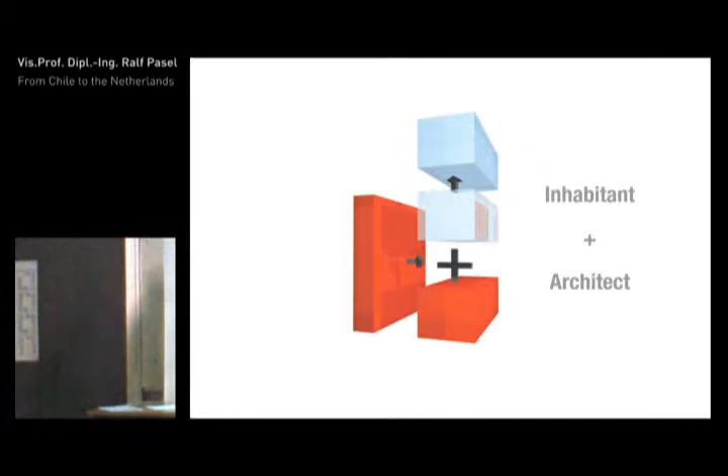So actually it is a combined design project, if you want—not a ready-made design, but more a strategic design, where we as architects just build a part of the house, and the client, the future inhabitants, continue permanently to change, transform, and adapt the house.

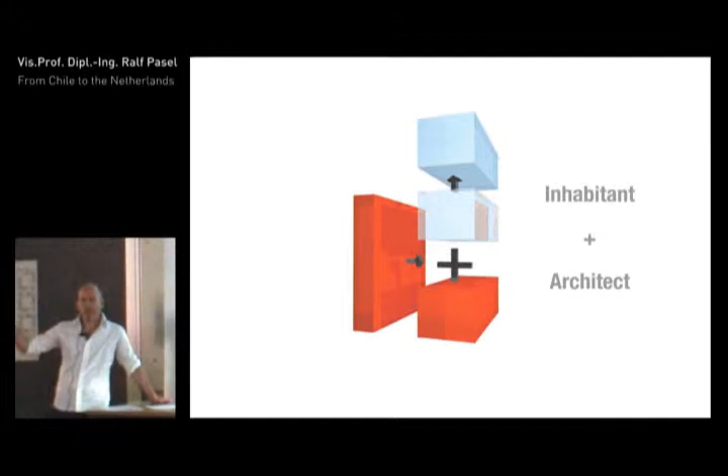So there was no point zero where we could actually take photographs of the whole lot of our work, since by the time they finished house 10, the first one was barely recognizable again. The speed of transformation in these areas is incredible.

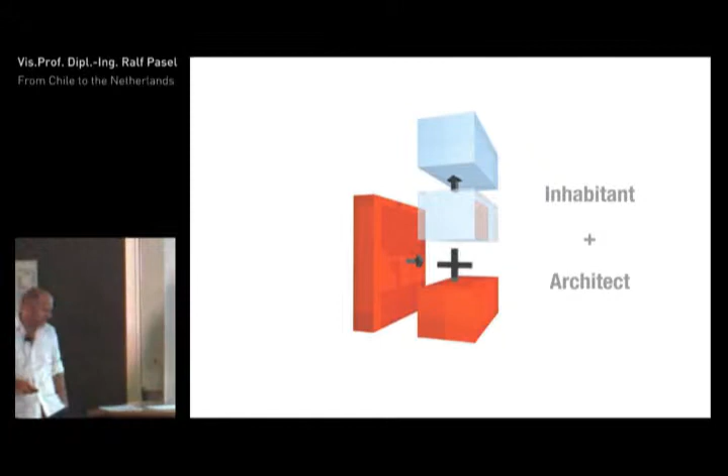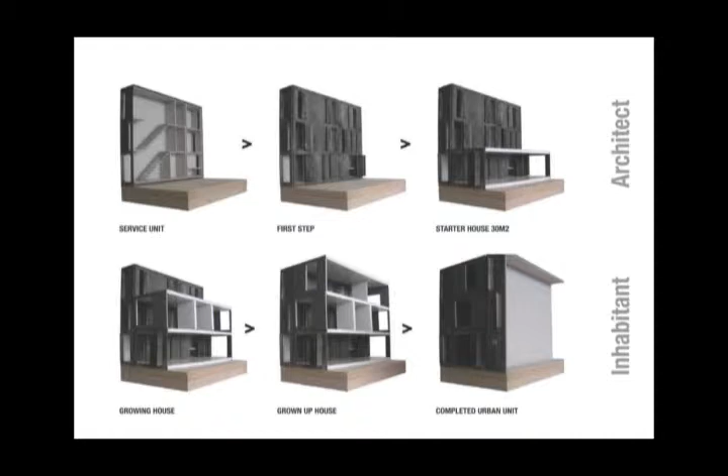The backbone of the house, the slab, that in the first three images, that comprised everything that's technically complicated: ducting, wiring, stairs, kitchen, bathroom, front door, house number - very important, don't forget the house number.

You cannot apply for electricity, you cannot have a mobile phone if you don't have a house number. So first of all, we had to give all these people house numbers, because without this funny house number, you do not exist. Actually, that's not only a Chilean problem, that's also a problem in a lot of countries in Africa as well - a typical slum problem.

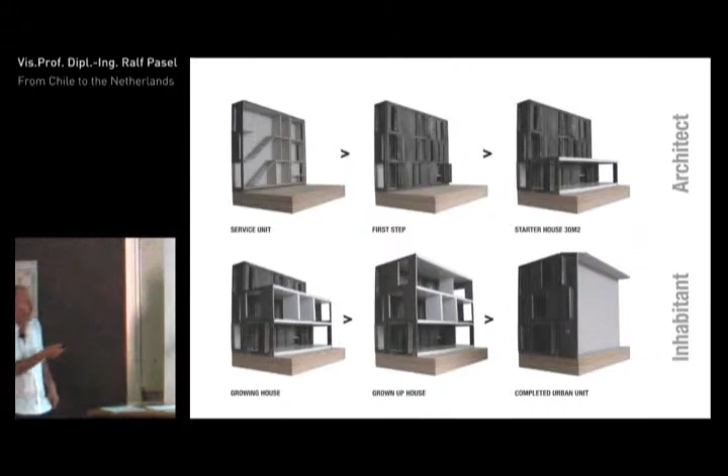Anyway, the job of us, the architects, were the first three phases, let's say, of the three images in the model, and then the inhabitants continued to work on the building.

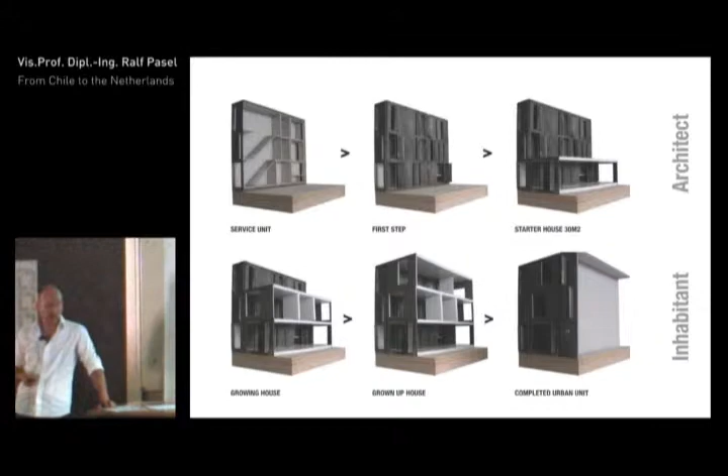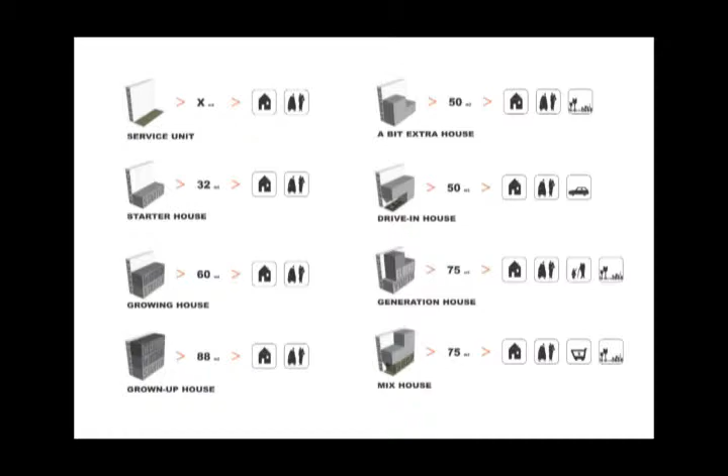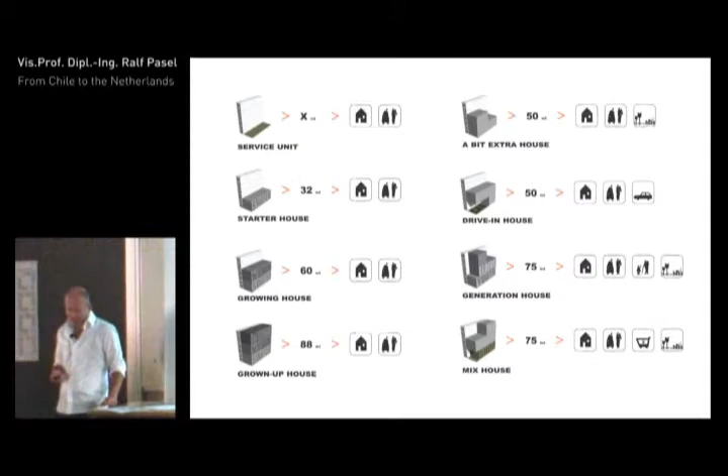Needless to say that 3 generations, 9 people have different needs, different wishes, different necessities in how they use such a building structure, in how they cope with it, and in how they're going to explore it further. The only thing that was clear to us very quickly is one of the big problems of these neighborhoods is actually that there's no public space.

Public space is swallowed up by informal developments, illegal developments, for about 55%. That's also a funny distinguishing factor, actually - informal development is not necessarily illegal development.

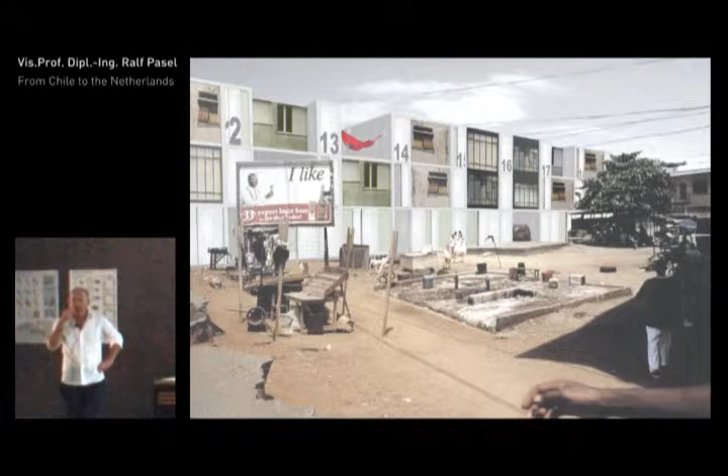But anyway, by introducing a 3-story high building structure, we got the opportunity to generate extra space - space that could be used for meetings, that could be used for collective festivals, that could be used for any kind of encounter where people could meet, sit together, eat together, or do whatever they want together.

They could talk together. A space that we think is so absolutely natural to us, these semi-private spaces, but to them a totally new phenomenon.

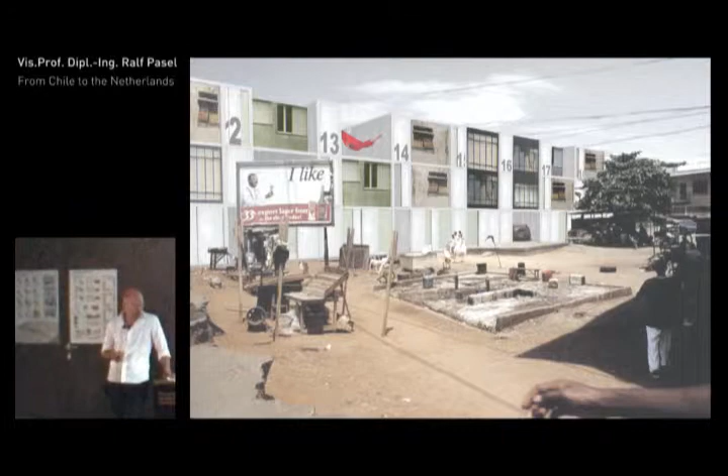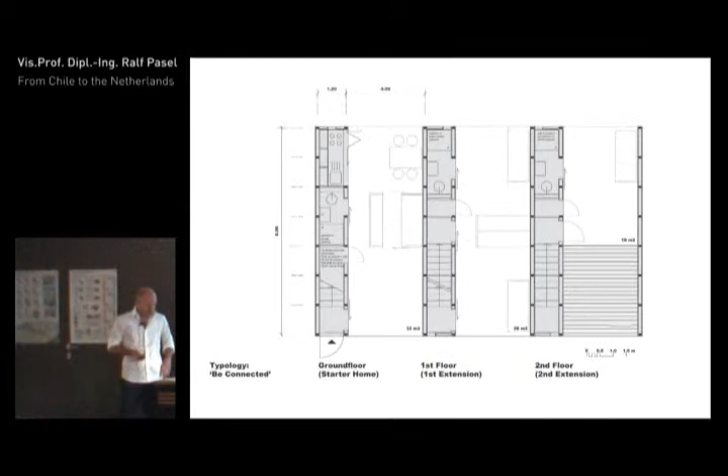Well, this is like the floor plan - what the floor plan would look like, very simple and straightforward. And then once we got inside for the first time, reality kicked in.

We found out a lot of things that made us think and rethink our building structure. For example, this little device here, we always refer to it as Granny's stove. It's cast iron - most of you may not even know it anymore.

But it's actually a very, very smart device. It can warm water for washing. It is a central heating system. It can cook. It is a social point of encounter, of meeting - it's the central area in the house where the whole family comes together. And not unimportantly, it runs on everything you find on the street.

This is a device that was a donation by a European company, providing the whole neighborhood with 5,000 of these gas cooking devices, which are still in use, funny enough - but not as a cooking device anymore, but as a CD rack, a shoe rack, some kind of storage.

They all still have them somewhere outside their little huts, but they're not used as a stove anymore. Why? Once the first bottle of gas is empty, there's no money to replace it, to refill it, and if you had the money, you would not easily walk it to the next bigger road, where maybe a gas man would come and sell you a refill.

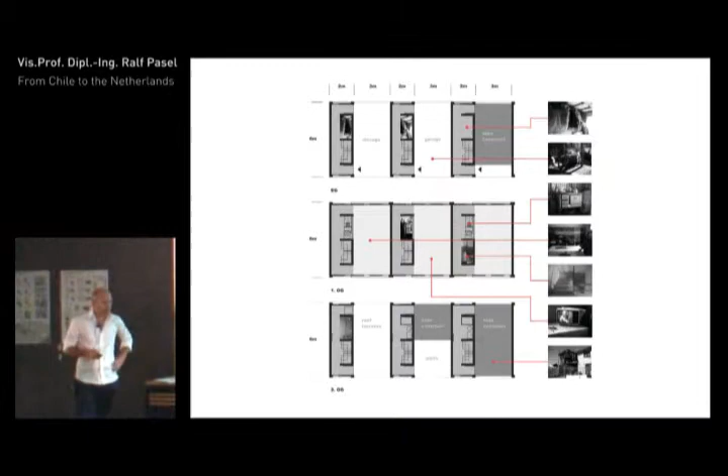And then when we first got on site, we kind of suffered the same shock Anna probably had in India as well. Our project was growing overnight from 150 families to about 600 families, from 1 hectare to 6 hectares, including a primary school, a community center - the whole thing was kind of exploding.

And we thought, okay, where does this end, right? And what are we doing here? Is this a repetitive and generic thing, or is this a very specific solution to that neighborhood?

So we tried to get a foot on the ground, and with the first unit we proposed, all the academics we talked to were totally sure this is the solution to go for.

We are building for Mapuche Indians. Mapuche Indians are people from the ground - they're soil connected, Mother Earth. They live on the floor. They would never, without having...

Okay, we can do that 50 times, but 500, 600 times, I have no idea. So we got a bit scared of our proposal.

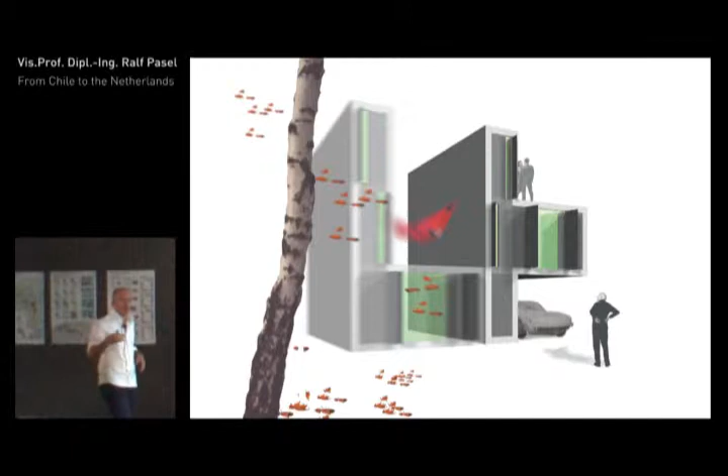Now, the work we did—my Spanish is appalling, and Frederik's Spanish is even worse, so we were illiterates under illiterates, literally. And that was absolutely brilliant, because we worked in sessions with about 1,500 people, divided into 10 groups, on their houses, with little models and sketches, and there was very easy communication. It maybe took half a day to get used to each other, and then we were all sketching like mad. We didn't know what we were talking about, but we were communicating through models and sketches, and that was a very interesting experience.

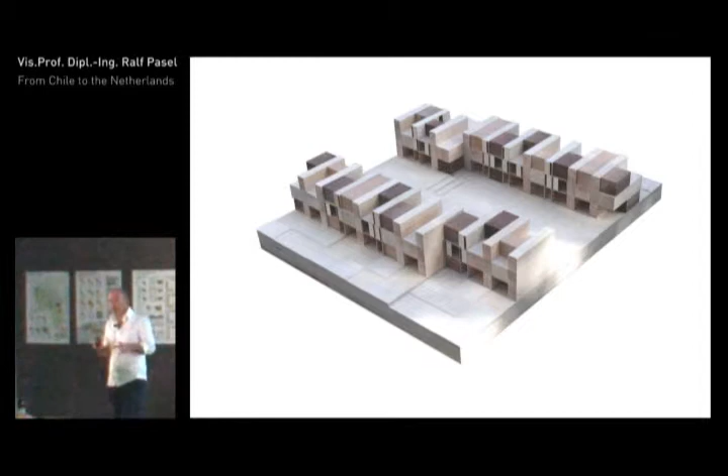The social workers, who ran a parallel social program on that whole neighborhood, really pushed us into that kind of cluster work, getting people divided into little groups together with our Chilean partners. This is Alejandro Aravena, a friend of mine, whose office supported the project as well. Together we worked on these little clusters, 20 families together, surrounding a semi-private, semi-public space, arguing about what that space could be used for. That was really interesting to us.

We were really worried about getting this stuff built, but once the design, once the principles were clear, everyone agreed on it. Then for months and months we were arguing about gated communities—should it be open? What if a little neighborhood invests in a bench and finds it the next morning 2 blocks down the road?

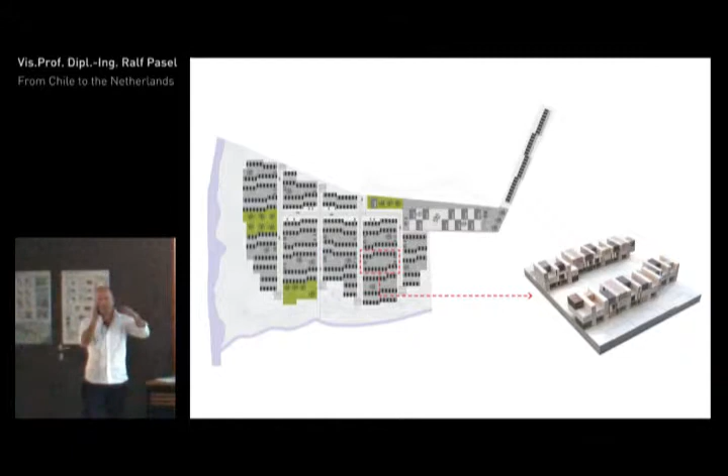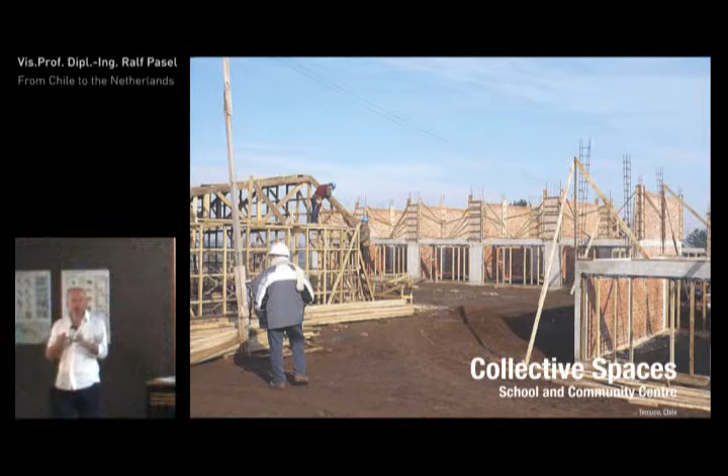Out of the construction principle that led to this kind of courtyard situation, we derived the whole urban plan. That's my point here: normally when we talk about housing developments, slum transformation or upgrading processes, there's always a big idea of how the whole neighborhood has to be transformed. From that master plan idea, it's broken down into little sections, parts of the plan, and from that plan, architecture is derived. Here we did the total opposite: we started with a construction principle of a house that led us to a mini neighborhood, a cluster, and from that cluster idea we developed a whole neighborhood.

Now, I have to say parts of this did not work. For about 7 or 8 months we tried to develop the slum one-to-one, thinking we could leave the people in place, moving them 5 meters, building the first house, moving them in, then doing the next house. That turned out not to work at all—a total failure. But what did work is the other side of the road: they moved 500 meters. They're, if you want, relocated, but just 500 meters. We can argue about whether that's relocation or not later at the bar, but anyway, they're pretty close to where they started off.

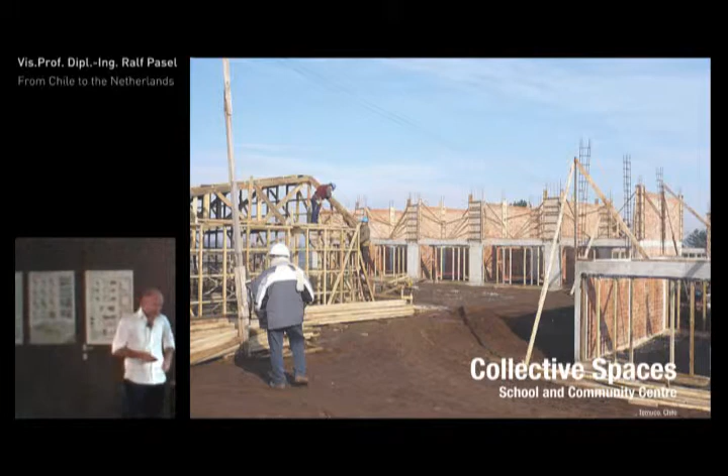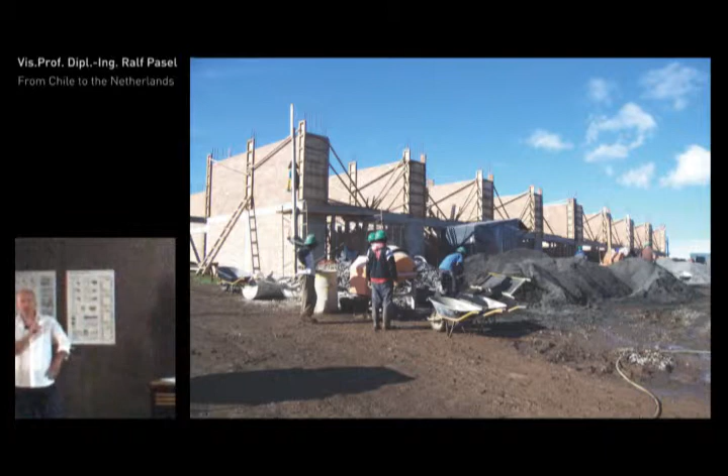Another point that's interesting when we talk about affordability—and I'll show you 2 other projects—is that, like KPMG defines it, it's a generic term. We do not know who we're addressing, which is the target group. Affordable housing for the rich, the middle class, or the lower class income? What are we actually talking about? It's a totally useless term, if you think about it.

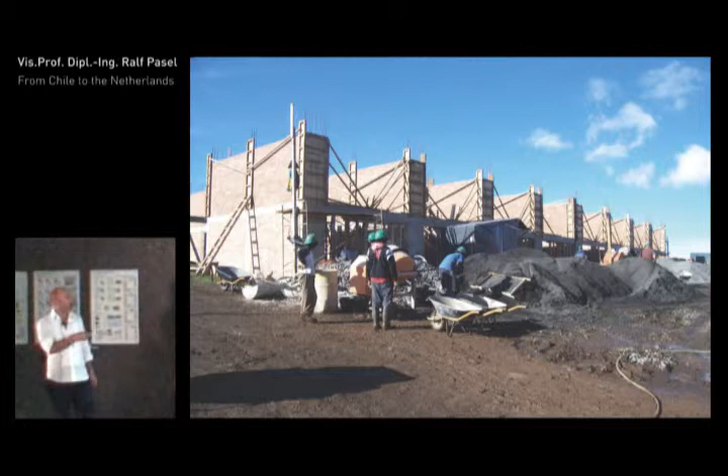This is clear: the target group were almost the poorest in the country. I say almost because this was not a 100% donation, even though there was a lot of American and World Bank money running into this project. This project had a self-contribution by the families of 150 euros. That saving of 150 euros would take them 7 years on average, okay?

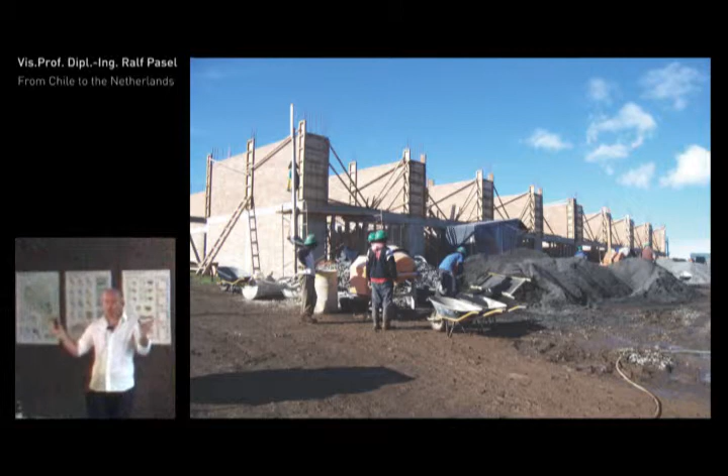That already is a distinction within that very, very poor group of people. Now, what did we do in order to not exclude those who could not even afford the 150 euros over 7 years? They got involved in the building process.

In that neighborhood, we had an unemployment rate of 93%. We knew that a lot of these people had a pretty good education, craftsmanship education. There's a lot of forests around in that area, a lot of woodwork going on. So we made a deal with the contractor that he would have to employ people from that area to help build their own neighborhood.

That, of course, is something the social workers really jumped on and said that's great, because that would address the issue of how we can actually tackle the problem of identification with such an area.

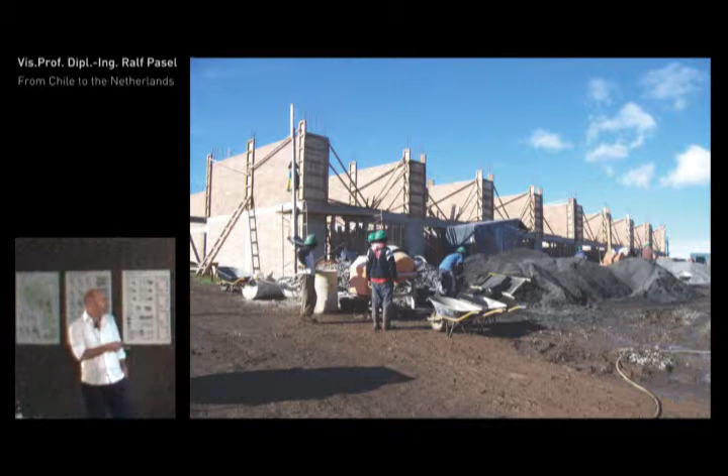So obviously, architecture and urbanism are very close to each other. Actually, this is our point, what Joachim also just said - they cannot be separated. And Anna just said it as well, that you cannot think of one without the other scale. So this scale component, and the whole issue of who the city actually belongs to, is something we argue a lot about in the office.

And I don't have a solution, I don't have an answer to this. Who does the city belong to? Obviously not... But the debate in the office runs between two extremes. Is it an individual achievement, or is it a collective good? Or in other words, is it mass customization, or is it custom made?

I want to present another project addressing a totally different target group, in another exotic country a few miles from here - a project which is not in Rotterdam but in Leiden, maybe 10, actually 20 miles north of Rotterdam. It's a typical sort of reurbanization project.

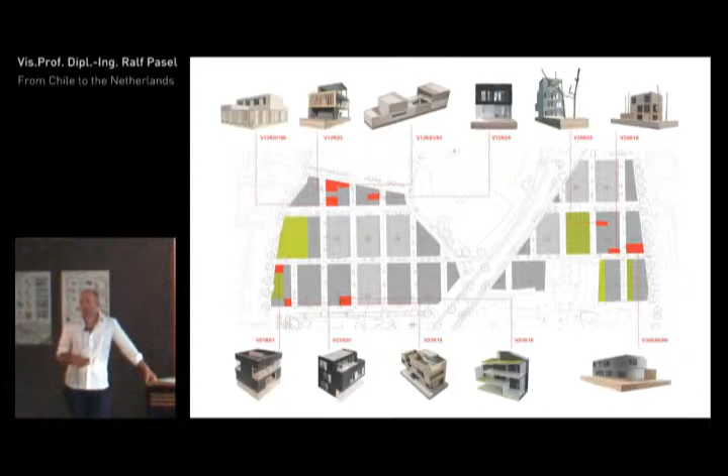Why we did this is because we thought we had to come up with an alternative to the usual development of these city spaces. This is probably the last site in Leiden available at this scale for the next 100 years, so it's very precious - not something you easily build on and that's it. So we had the idea that this might be a way to bring a variety that kind of mirrors the society of the town in the 21st century.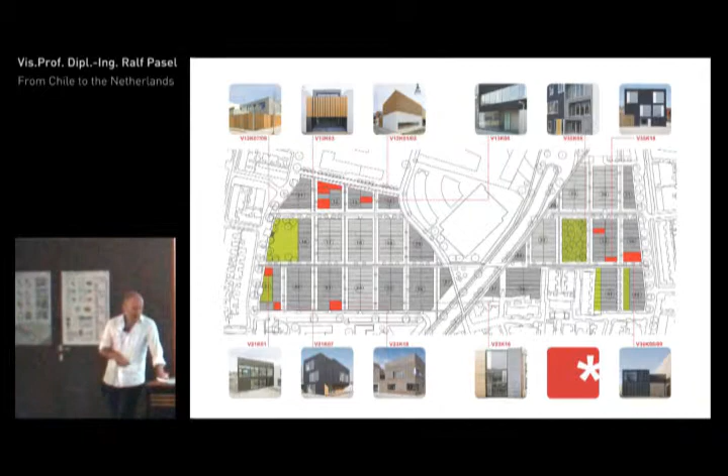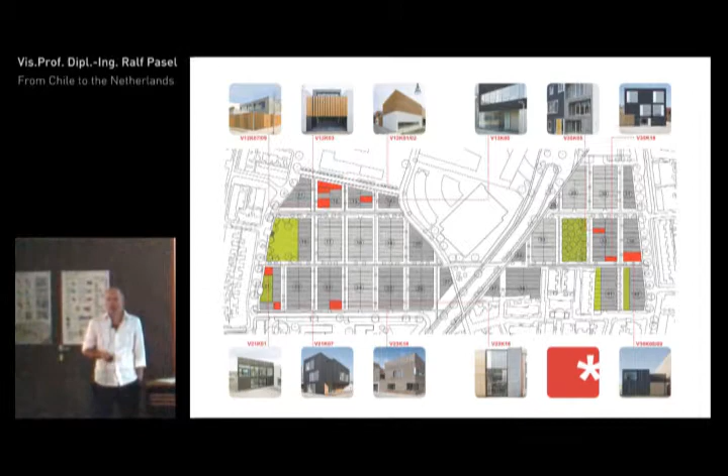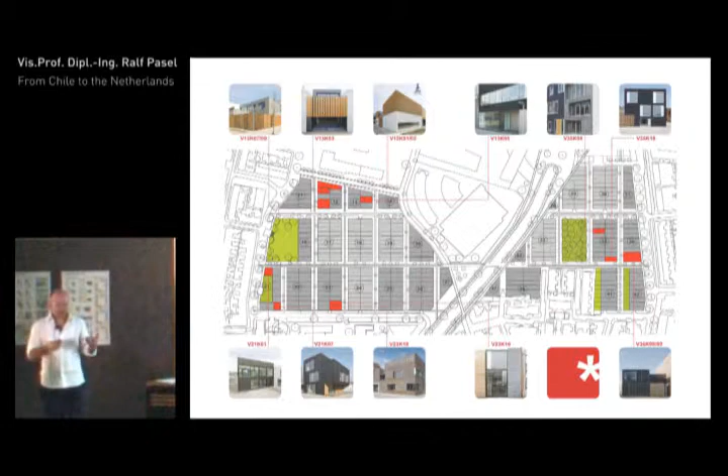Now, the tricky thing of that development was that there was a budget regulation, and the maximum building costs on all these projects were 1,050 euros per square meter, which is not an awful lot, just above 1,000 euros. The question is, if you address private clients together in a collective kind of group, since they develop something like this together, 18 parties back to back next to each other, building on a collective parking garage, developing one big block, but still everyone develops.

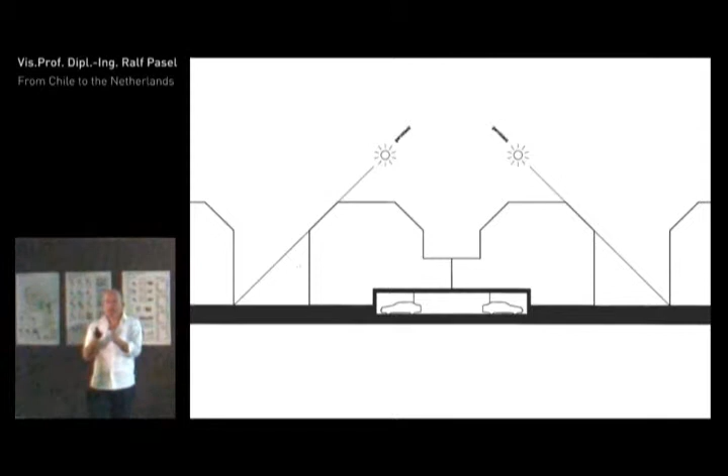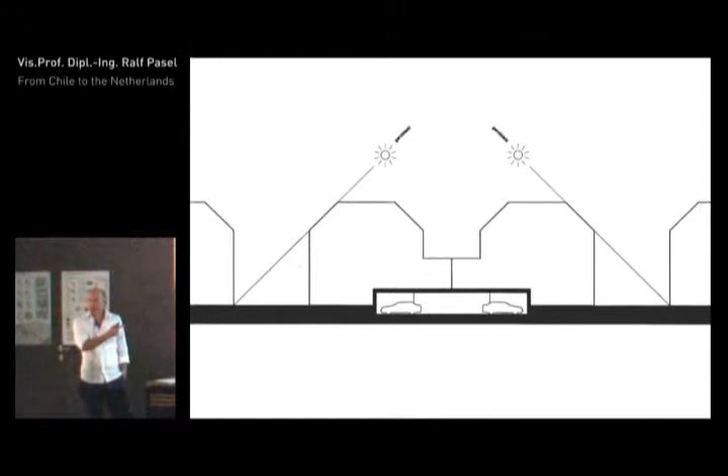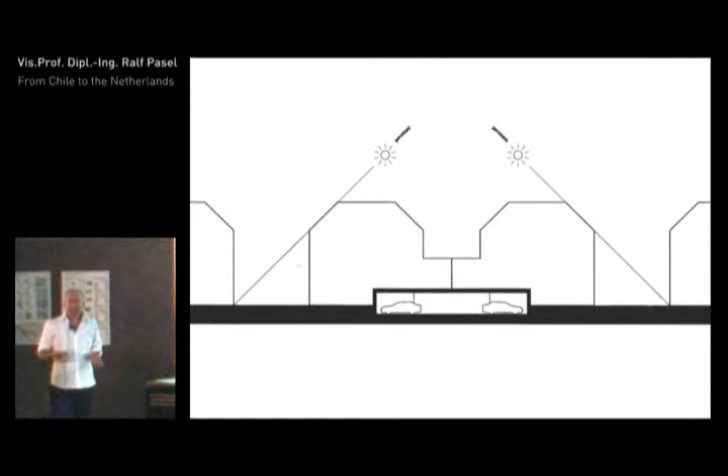It's a complicated process. But anyway, this is the principle of how we thought we could try to build the city in our times. And this density had two architectural consequences: the question of outdoor space and the houses. Since the plots were so small and land so expensive, the plots are very condensed and compact, so we somehow had to deal with these two issues.

We made a prototype house for that, a prototype house that actually did exactly the same thing as the house in Chile. I remember a lecture we gave about 3 or 4 years ago, someone said, 'Have you ever tried a different floor plan? Are you doing the same thing again?' And we said, 'Well, actually, we pretty much do the same thing.' Here too, we put everything in one cupboard, in a service slab.

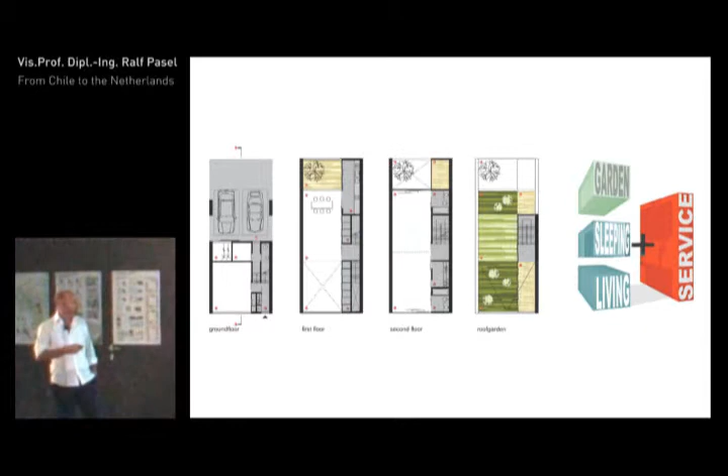We cleaned the whole space, no partitioning walls. We only have one facade to light up the whole thing. So we needed to clean up the whole floor plan system in a way. And while doing so, we had the chance to integrate double-high spaces at the front that would allow daylight to come in deeper.

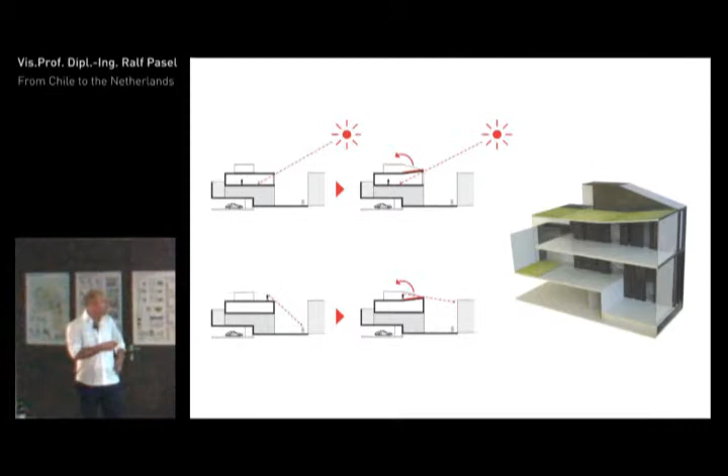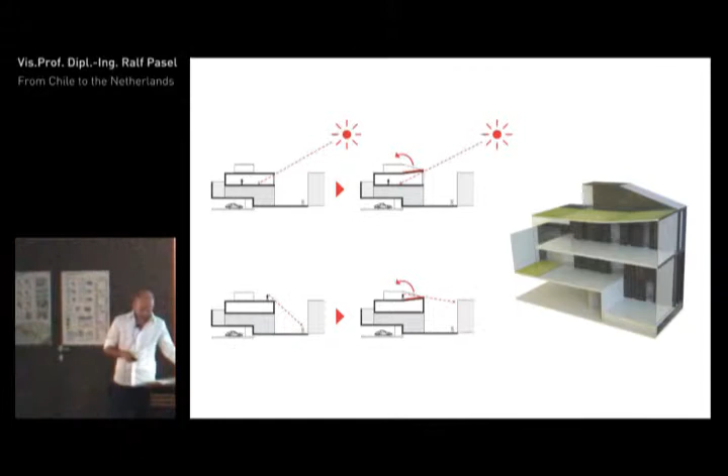We folded the floor, the roof, a little bit up. That allowed us to meet the low energy standards we had to fulfill, since we made this slab particularly heavy as a buffer that could accumulate warmth over the day and release it during nighttime. It's a little bit the scheme you see here. Also, by folding the roof, we interrupted the sight line of the roof garden from the street, disconnecting the visual relations in order to give it more the idea of a backyard rather than a front garden. This is what it looks like today.

Construction-wise, if you want to build for 1,050 euros a square meter, you have to come up with a prefabricated system in the Netherlands. The Netherlands anyway is dominated by serial housing structures, by serial housing developments. They have a big tradition in standardization, a very high level of standardization, which is an advantage on one side, but has a clear disadvantage: there's hardly any craftsmanship left in the country, since on these building sites you only need one person who actually knows what to do, and the rest are just uneducated workers.

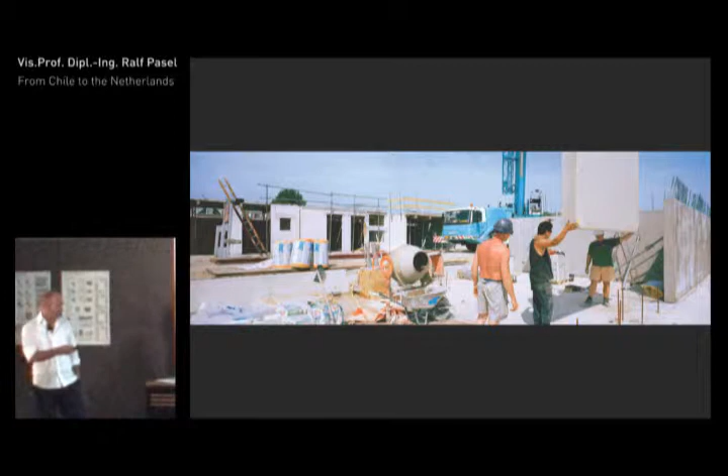Even the simplest bricklayer is much higher educated than most people working on this site, I have to say. This is how simple the whole thing is, and that is also why it's so cheap. So this is the price we actually have to pay here, and it's actually a pretty high price, I think, if you really think about it socially. But that's the situation in the Netherlands at the moment.

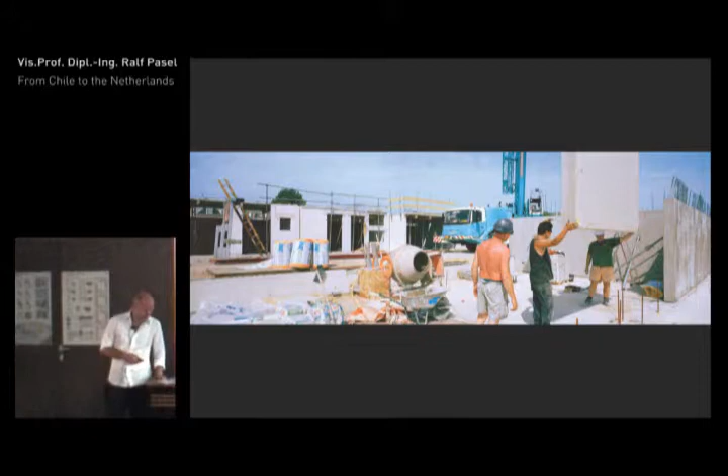Further to the materials, I'm going to drag you a little bit through the manufacturing of the house. Most materials were far too expensive, they exceeded the budget by far. So we had a day trip to the port of Rotterdam where we saw a lot of industrial materials, and the waste products we got for special rates, and we could integrate them into this building. Part of that was the stretch metal.

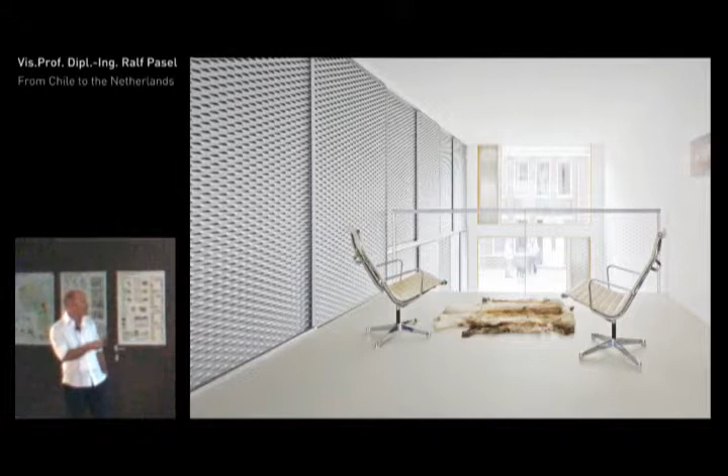It reflects the light a little bit deeper inside the building. It is used as cupboard doors, sliding doors, the kitchen behind here. You cover things, you open things, you connect spaces, you disconnect spaces - it's all done by that one and only material.

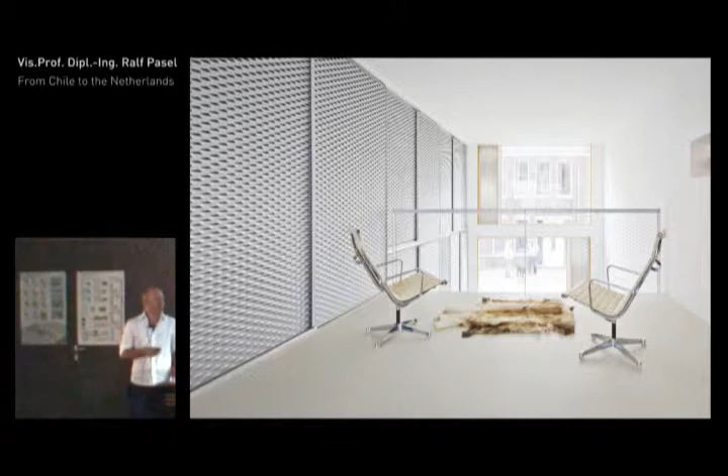The floor is just a concrete floor, coated with PVC coating, €5 a square meter. The walls are just filmed, painted white. That's it. The most expensive thing here is actually this dead cow laying here.

There's one detail in the house that's special, that makes it very personal. It's a very rational timber stair, made out of oak, which is very costly, but it comes from an old tree the owners cut years and years ago, and found in the shed of their parents. We kind of reused that old oak tree. So there's a story behind why this pretty slim staircase is put into the building.

What we try to do with all these 11 houses - I'm not going to show you more than this one - but all of them use one material only. All of them try to work with one principal detail. They're all optimized to the last bit. The floor plans are squeezed out to the last square centimeter, and so on. You have to fulfill these regulations to get your fundings and all that. I'll spare you the details on that.

The thing is, we try to work with one thing in one house, and we do that from concept to realization, from big scale to small scale, from inside to outside. This is where we think we can add something of value to the debate of affordable housing - its architectural limitation.

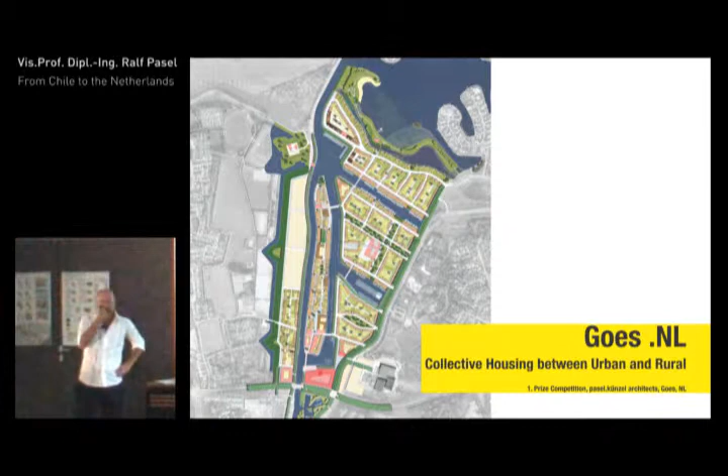This is a project that tries to find a solution for how to build in times of crisis. There's one little town in the province of Zeeland, the southernmost province of the Netherlands, that has a small positive growth curve. The city decided to push that by making a super big development - down at the bottom of the image is the old city - giving up the port, since Antwerp and Rotterdam have taken over the economic predominance anyway, and the port area is going to be transformed into a new town development.

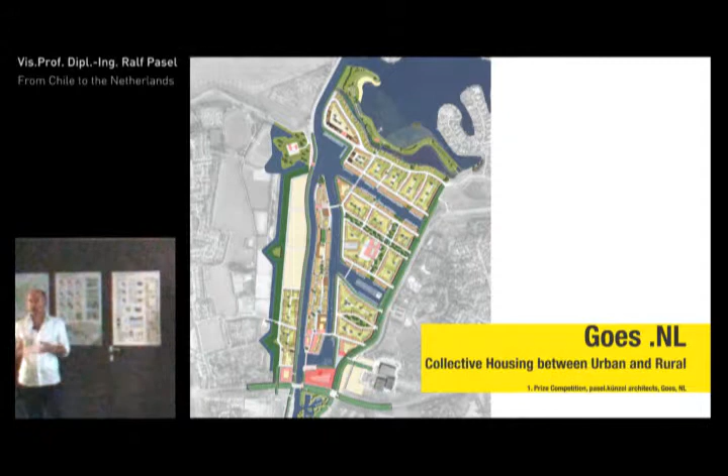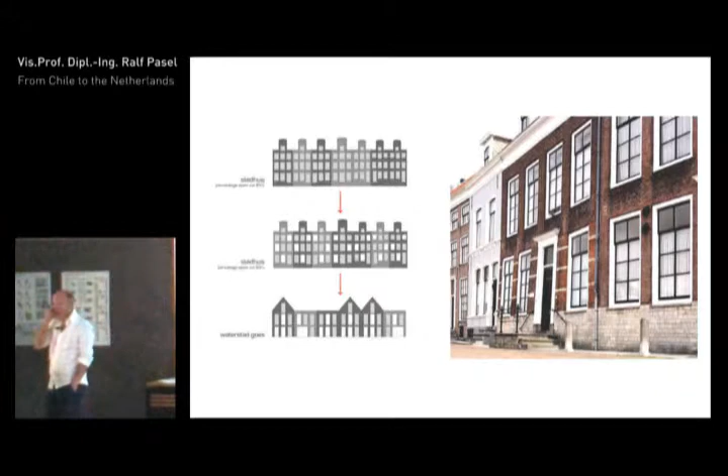Once that area was one of the wealthiest areas in Europe - Golden Age, 17th century, salt trading, Piet Hein. All these big explorers, the Dutch explorers of that time, started in either Goes or other little towns around that area.

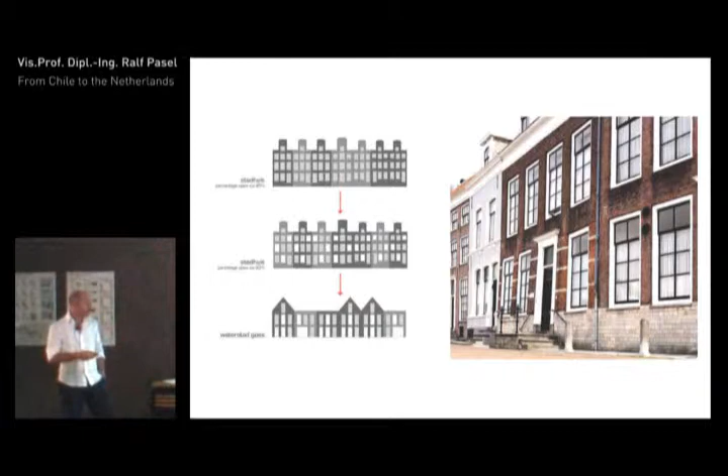And today, big question mark - what are we going to do? We cannot stop, we have to develop something. So we were approached by a developer with the Chile project, who said, 'Well, you guys did that project in Chile, why don't you do the same here?' And we said, 'Hang on, you're a developer.' We did it, and it was a success.

So you get out, and we can talk about it - well, that was not really an option. But he came up with a plan by West 8, by Adrian Geuze, and Adrian Geuze is very much into that kind of splitting up urban planning idea. He decided to put three architects together.

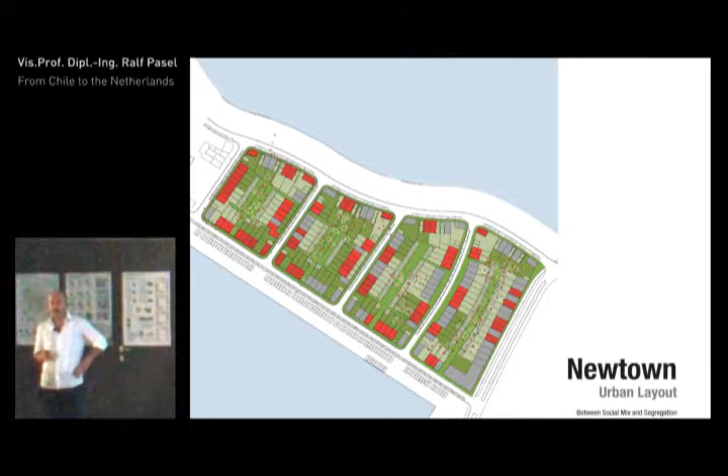Target groups: low income, middle income, high income - in the neighborhood, socially balanced. The red ones were our developments, and guess what - we got the minimum income group. Surprise, surprise. And what did we do?

We thought the only chance was to develop a catalog - we had to come up with optional ideas so people could choose a basic house, extend it, build on top, extend it to the backyard, add windows, and so on. That idea ended up with a financial limit of 880 euros a square meter. That's a price where we thought, we can stop here - this is ridiculous, we're never going to make this.

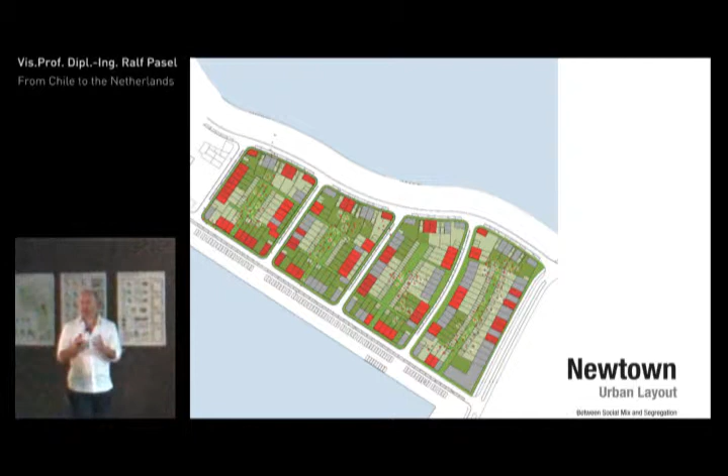Why? Because of that urban plan - it's maybe a nice idea, but it totally works against any kind of repetition. With three architects, you always connect to the left or right with another special detail. This didn't make sense to us in the beginning. We decided, okay, let's try it with a very rigid structure of a house - very simple. We chose the cheapest brick we could find, just make sure it's dark.

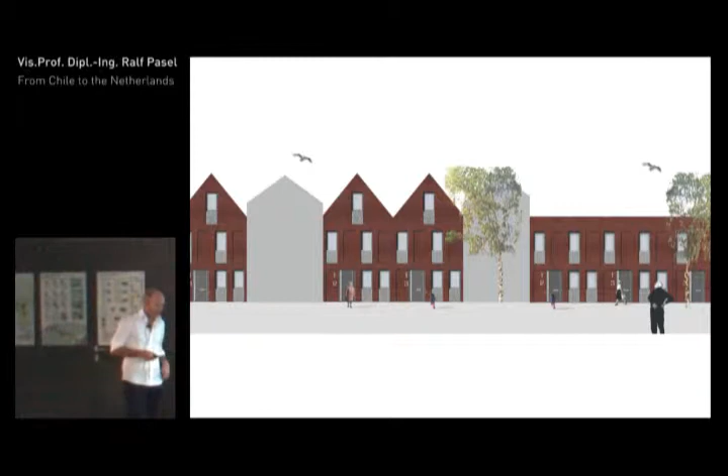Towards the materialization, brick is the cheapest material you get in the Netherlands. It's very, very cost efficient. We worked out a catalogue where people could choose 2 floors and a roof, 2 floors no roof, or flat roof, 3 floors, a 3rd floor over the full depth of the house or just a half, and so on. What stayed the same was actually the principal detailing and the materialization.

What you see here is part of that option: these panels could be easily removed and replaced by windows, so people could start with a low budget version, and whilst having economic success over the future 15 years, they could remove that panel and replace it by a window, or make an extension to the roof.

Now, all these restrictions forced us—that was our ambition—to not totally fall behind the quality of the houses our neighbors did, because that was our architectural panic, right? The highest income group had almost twice the budget we had, and we thought it's a bit unfair. In the end, they try to make everyone the same, but the starting conditions are very, very unequal.

So these were our principles. We really fought for the deep recessed windows, for that one detail; we fought for the maximum surface of glass from floor to ceiling—actually the only houses with this, funny enough. And we fought for own entrance doors. Every unit has its own entrance door on ground floor, no apartment buildings. And some of these interesting little details.

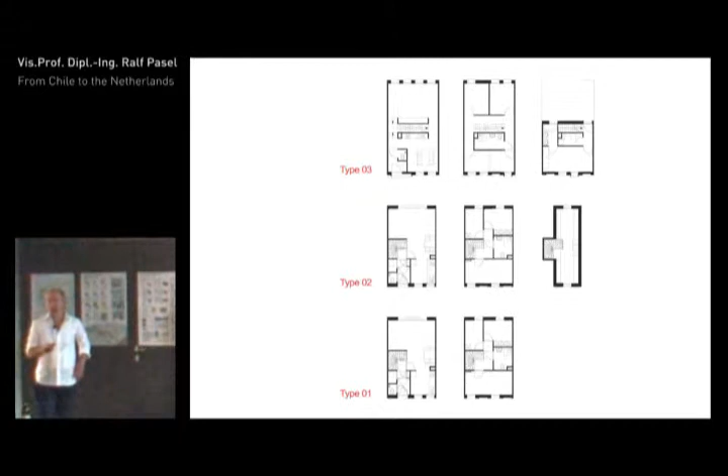Again, there's no square centimeter lost. This is the much standardized Dutch floor plan you will find all over the country. I'm not talking about moving a wall 5 centimeters—I'm talking about conceptually different typologies.

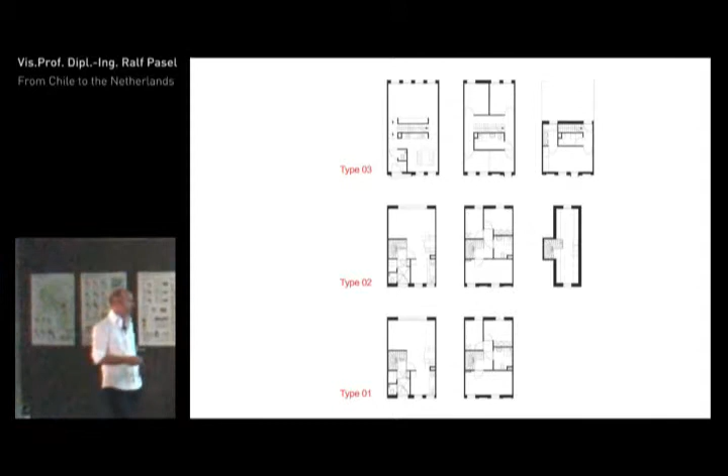Prefabricated staircase, prefabricated roof—maybe you've seen these roofs, they have roof construction with hinges, right? So they're prefabricated in a timber workshop, put down by crane, they fold them open, put them on the walls, and that's it. That's the construction method we had. And then we had options to that—2 and 3, and variations within the same family.

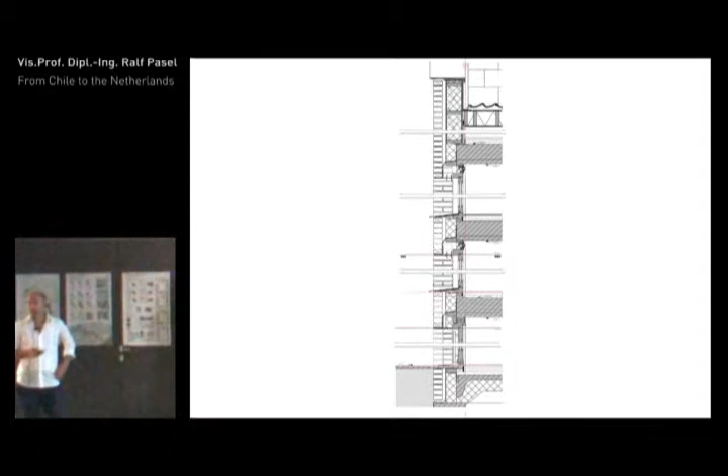I'm quickly going into one detail here because it shows the dilemma we're actually talking about. It's not very good to see, but this is actually a timber frame construction. So the house you see is actually fake—we're trying to build something here that we could not afford to build: a massive brick house like it used to be 300 years ago.

The funny part is, and maybe we can bring this into the debate later, my statement would be that the initial building costs needed to build affordable housing are probably very much irrelevant. What's much more important, at least in the debates we had with our client and our contractor, is the cost over time—because people will have to maintain the building over the next 20, 30, 40 years. Little crucial details, like brick being the most cost-efficient building material, matter: it's cheaper than a timber facade and has low maintenance cost. So this has one initial cost, whereas a timber house has an initial starting cost adding yearly maintenance costs over the next 20 years.